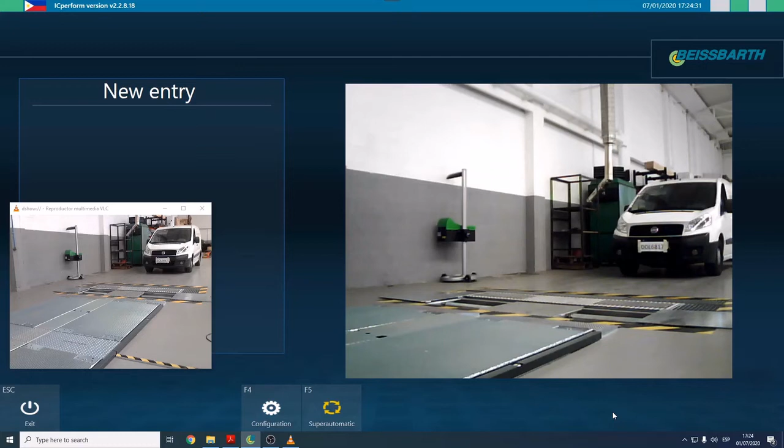Hello, my name is Albert, and we are at Kappa Test Facilities where a complete Beissbarth test lane is installed. Now we are going to show how the system works when the connection between IC Perform and the LTMS server is online and stable. First, it's important to know that the following three actions are performed automatically in background mode, and they are transparent to the user.

The first action IC Perform performs in background is requesting, in cyclic mode, the complete limit set for all possible vehicles to inspect. These limits are stored locally and are available from all the computers of the center. This allows the system to always be updated with the latest official limits. These actions are also very important for offline mode.

The second action is that IC Perform stores the users validated by the LTMS server in the test center's local database. These users are available for working offline for the next 7 days before expiration. This way, we can ensure that only valid users can operate the system offline in case of losing connection. The last action is that IC Perform cyclically checks for new vehicles registered by reading the RFID card, automatically creating the entry in the IC Perform system.

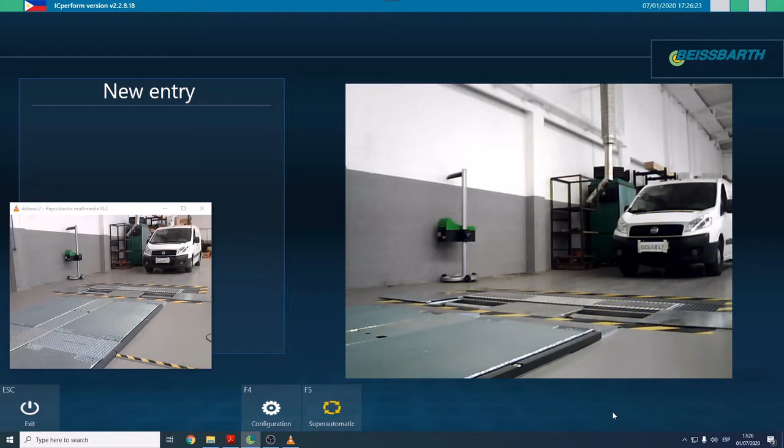Now we can proceed to show how a vehicle is fully tested in online mode. Once the vehicle arrives at the station, the first user, identified on the portable SBT 4000 device, reads the RFID card. If the vehicle does not have an RFID card, the user can request the vehicle data directly from the LTMS server using the license plate. Now we are going to show both options. The first one is the RFID card reading.

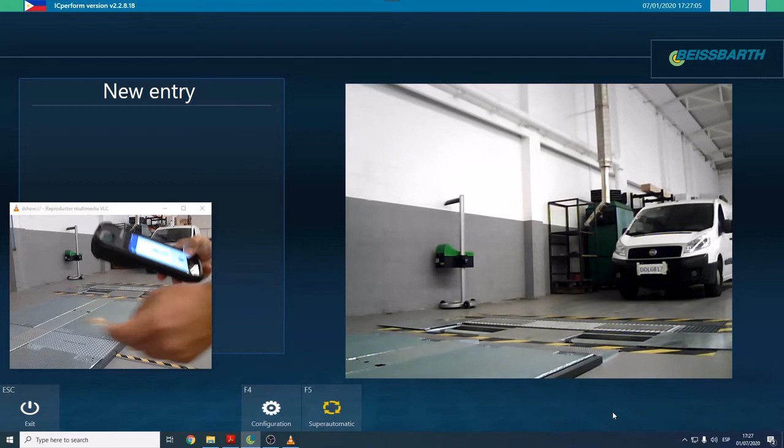So this is the device, and this is an original RFID card from the Philippines. By reading it, we can obtain all vehicle parameters.

Now the device will get the complete vehicle details from the LTMS server. IC Perform detects that the vehicle has been read and automatically creates the entry in the system. We can see it now under the 'new entry' label in the top left part of the screen. So now we have one vehicle registered in the system.

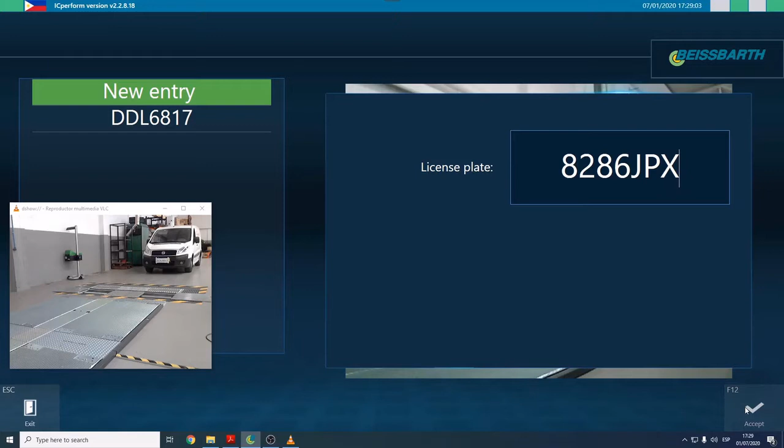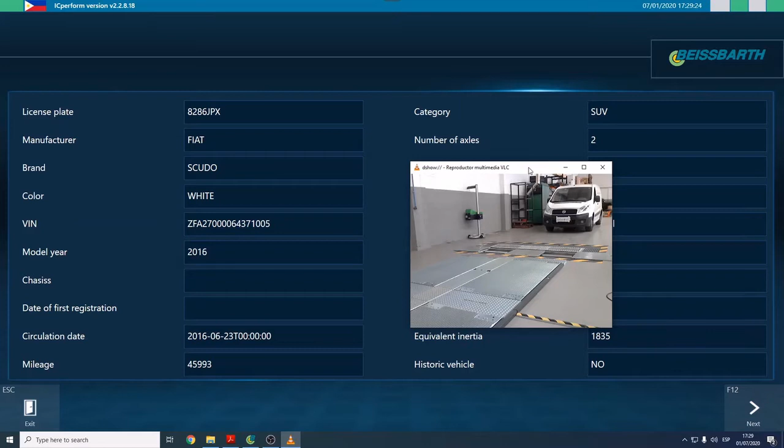This information is sent to the LTMS server, which gives us authorization to operate or continue operating. Now we type the license plate we want to add, and by clicking F12, the LTMS server responds with the complete vehicle details, coming directly from the database. Here the user can verify them and must confirm to register this vehicle into our system.

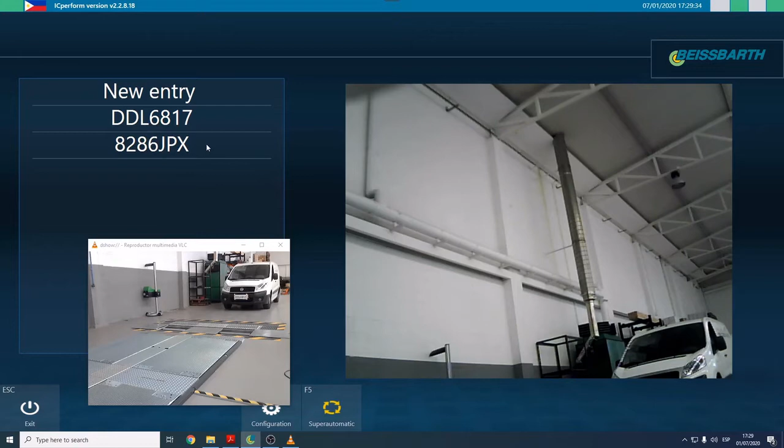So as we can see, we have both vehicles created here.

In this station, the first stage we are going to operate will test the side slip, suspension, and brakes, and also perform a visual inspection. To open the vehicle in the stage, it's necessary to identify the vehicle by detecting it using plate recognition. Now the vehicle will come to the stage. Once detected, we must identify ourselves again using the combination of username and fingerprint.

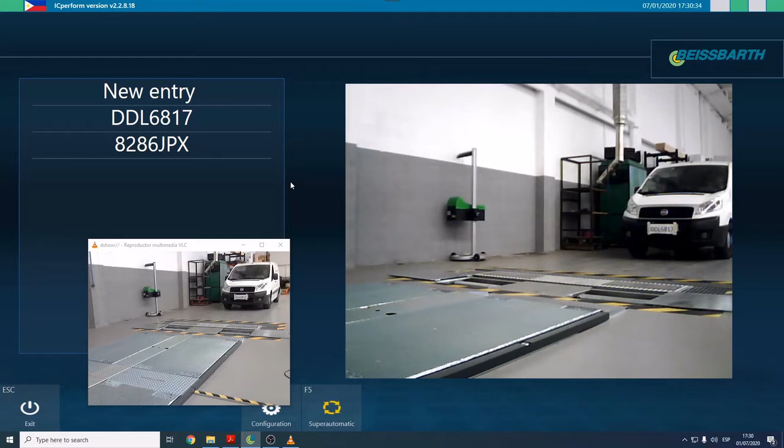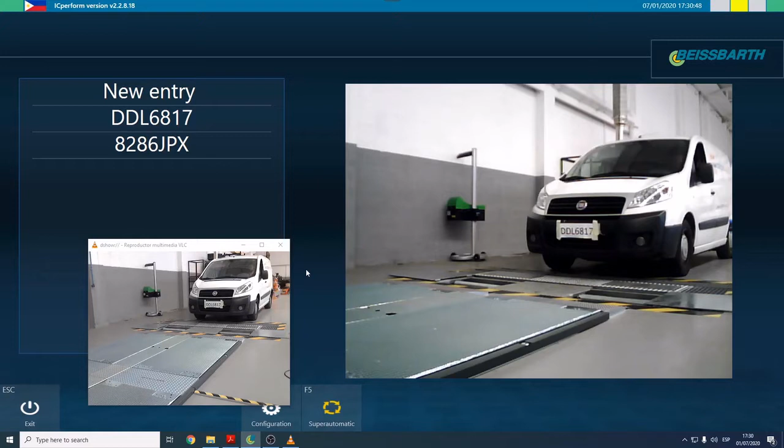So the vehicle is coming. Now, as we can see, this license plate is detected—it's the same as the vehicle's, meaning the vehicle is present, and we can identify ourselves. Again using the RFID card and the fingerprint reader, we get our biometrics, sending them to the LTMS system and receiving authorization to operate.

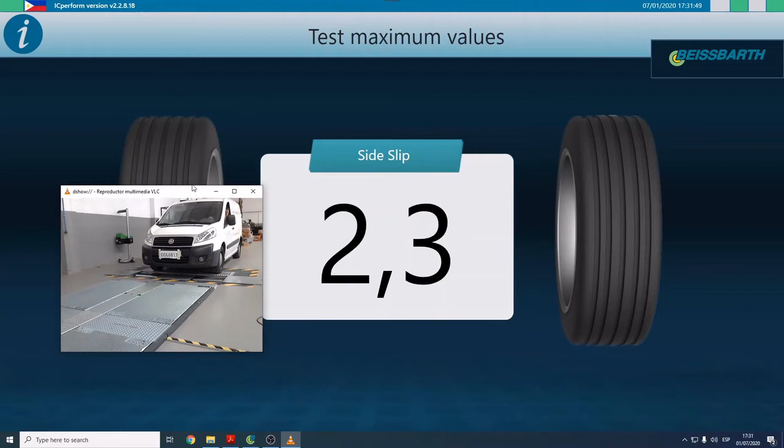Now we can start the test. First, we are going to test the side slip. Now the suspension test.

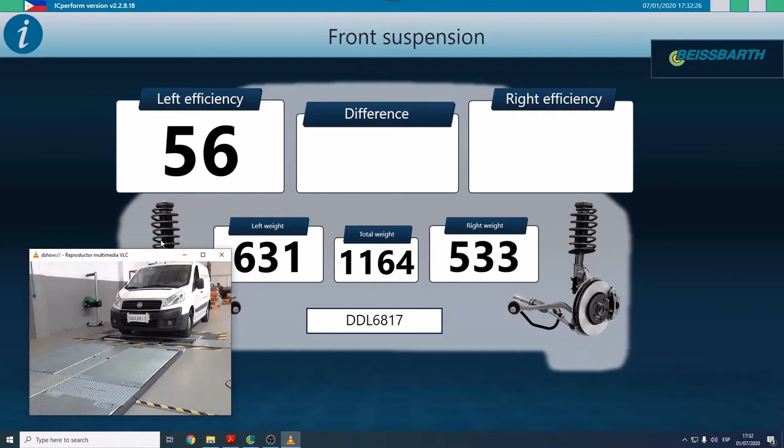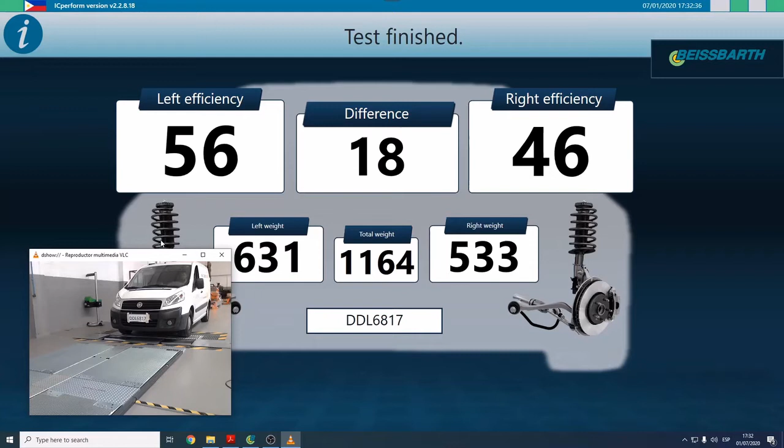As we can see, we are using a fake license plate because the RFID card we scanned identifies a vehicle located in the Philippines. To simulate how it will work, we created this fake license plate. Now the front axle suspension test is done. Now the vehicle is on the rollers, testing the front axle service brake.

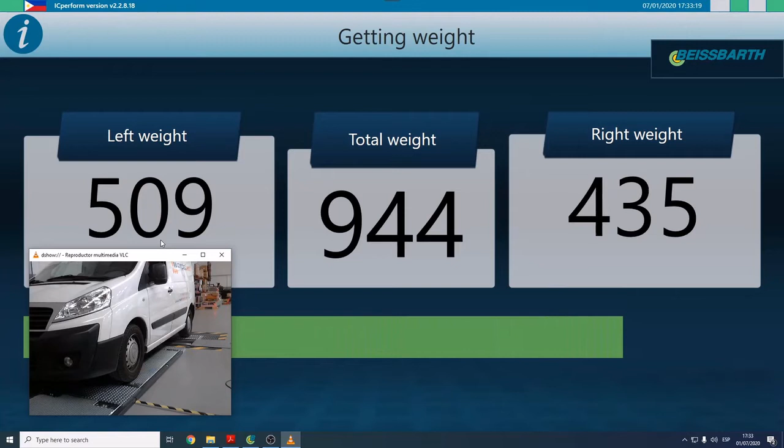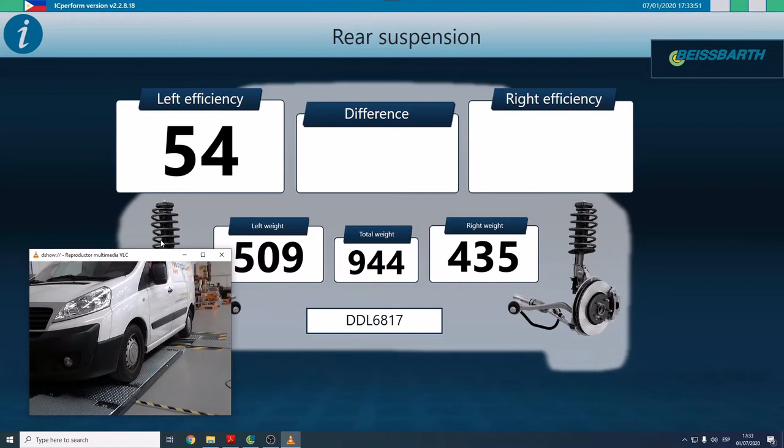Rear axle over the suspension plates. So the suspension test is finished.

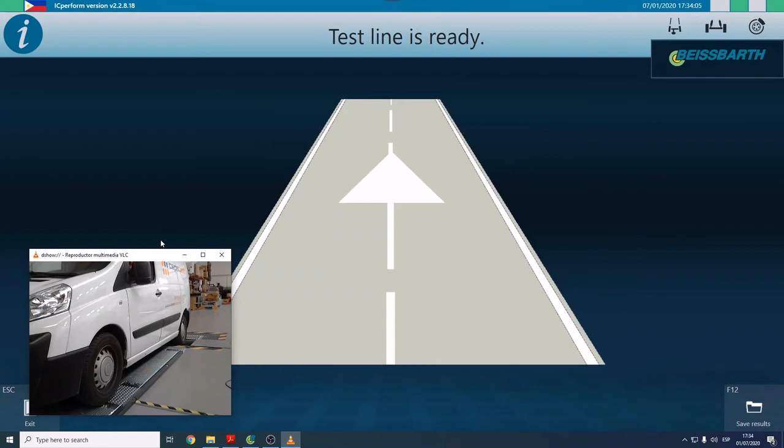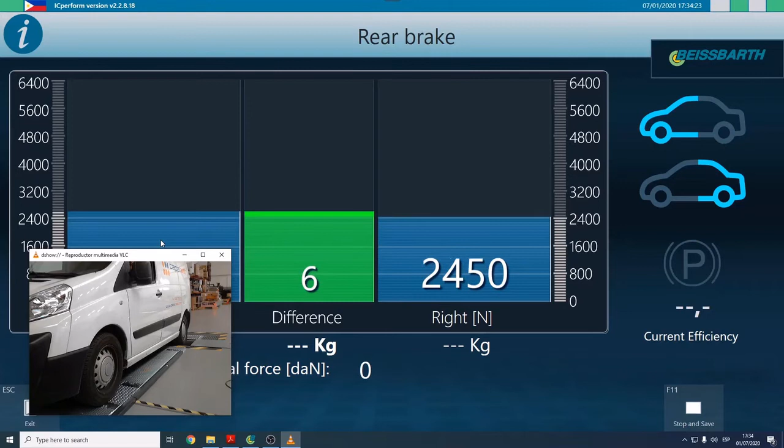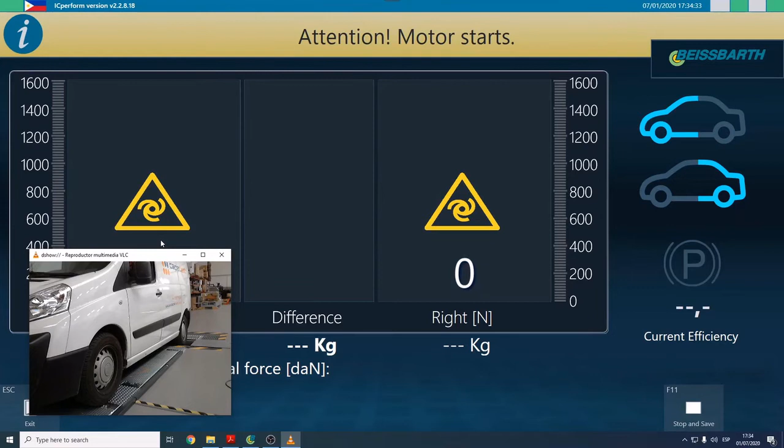Now we are going to test the rear and parking brakes. Now starting the parking brake. And now the test is finished—we can save the results.

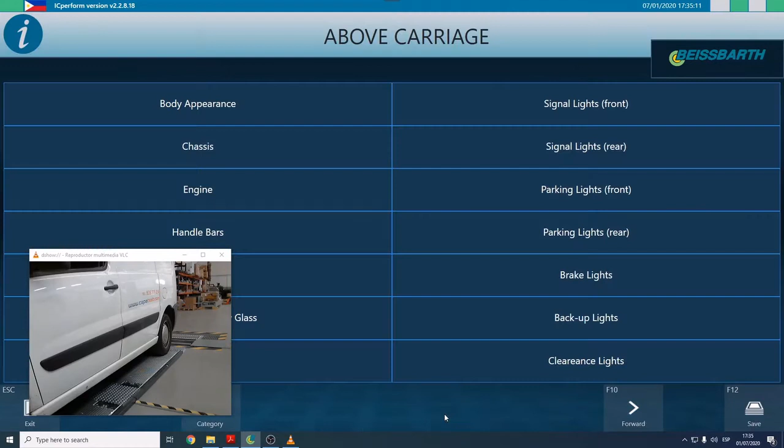Now we are going to perform the visual inspection. Here we can select between the categories: above carriage, under carriage, or others. To not take much time, we are not going to evaluate all the points—we are going to enter only some of them.

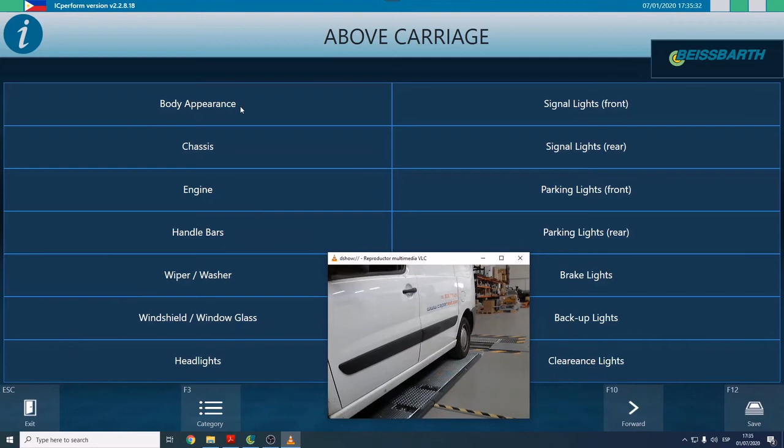For example, we can select between these three options. We can also select a different category. Once we finish, we can proceed to save the visual inspection.

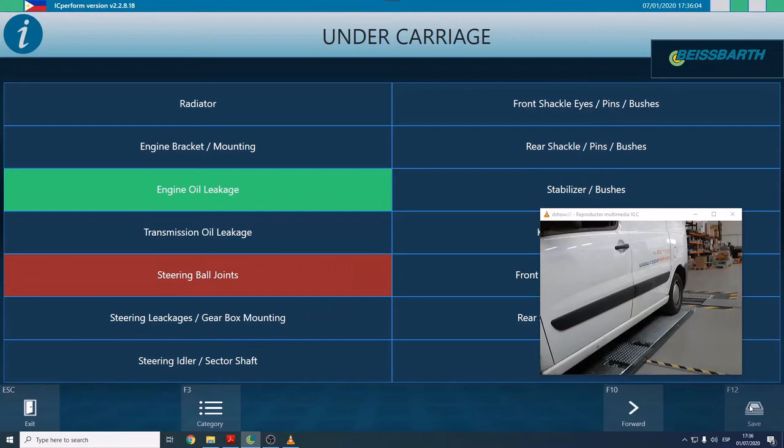Once the vehicle test is finished in this stage, the user can close it by pressing F11. Now the stage is closed and the results are sent to the LTMS server in order to have live data communication between the systems. Data is also stored in the local database. Now the vehicle can drive to the second stage.

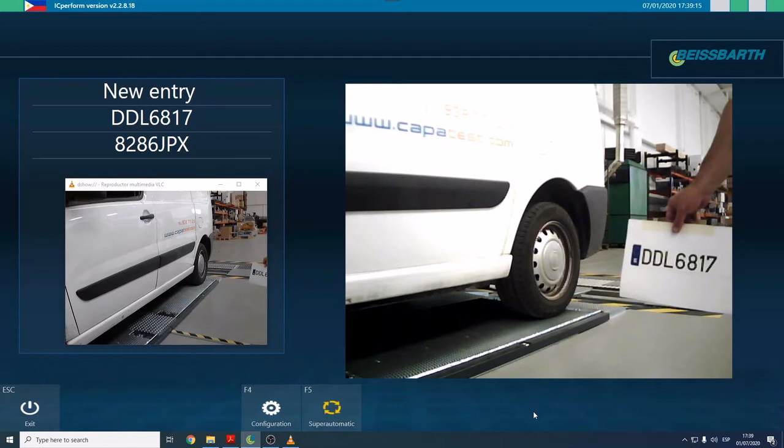In this second stage, we must do the same: first detect the vehicle using vehicle plate recognition. Now the vehicle is detected. Now with the F1 device containing the fingerprint, we get the credentials, and now we can start the next test: emissions.

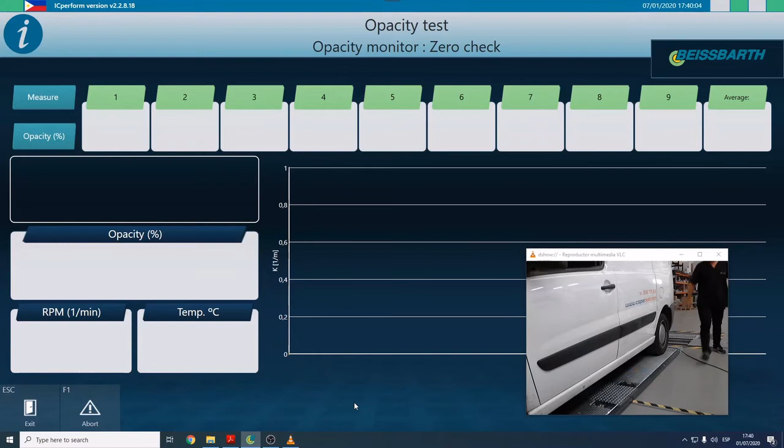Now we have values, the device is ready, and we can start.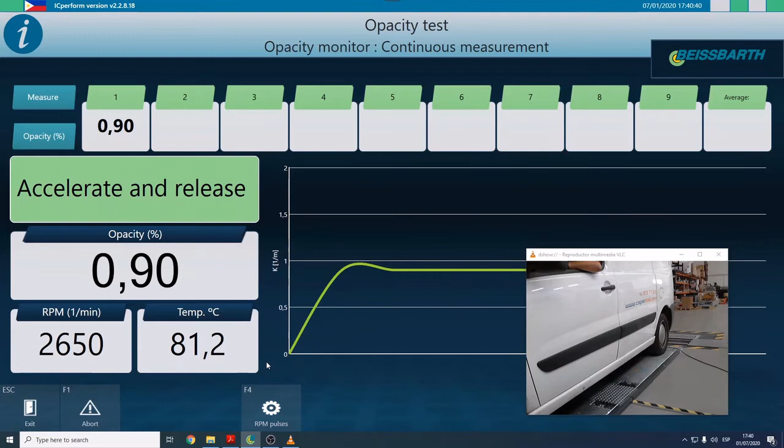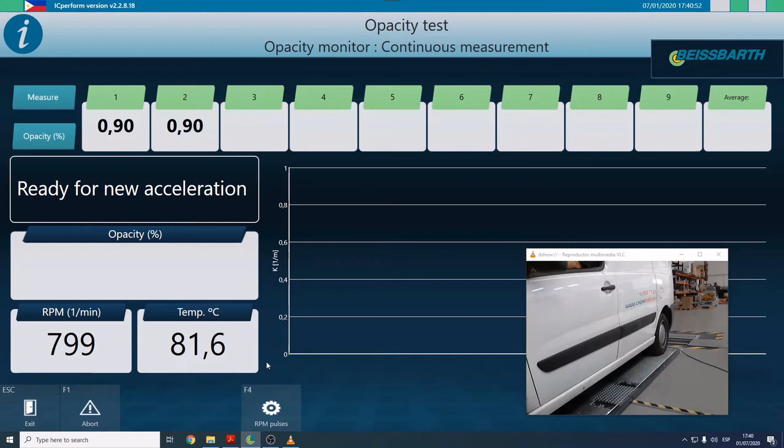Acceleration number 2. So we can see we have RPM, also oil temperature, and the opacity value.

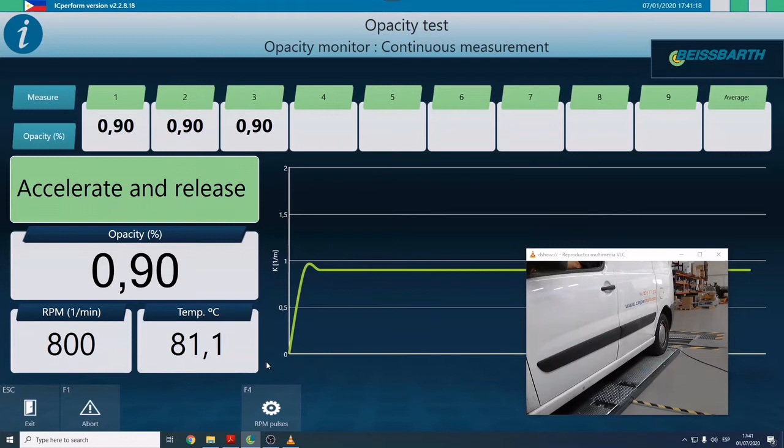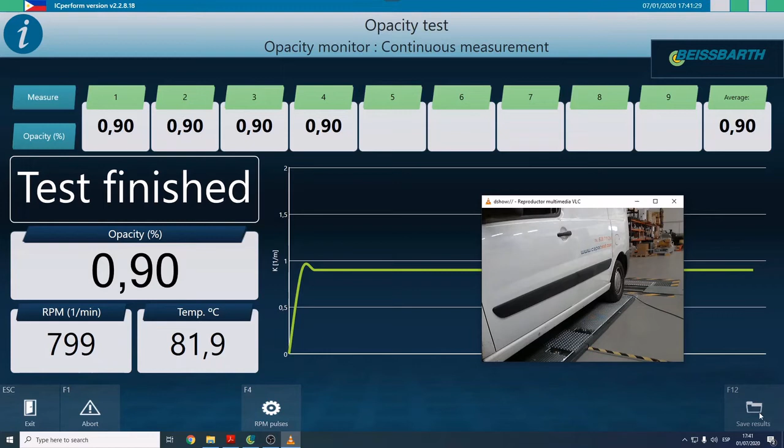And now the test is finished, so now we can remove the probe. And click F12 to save the results.

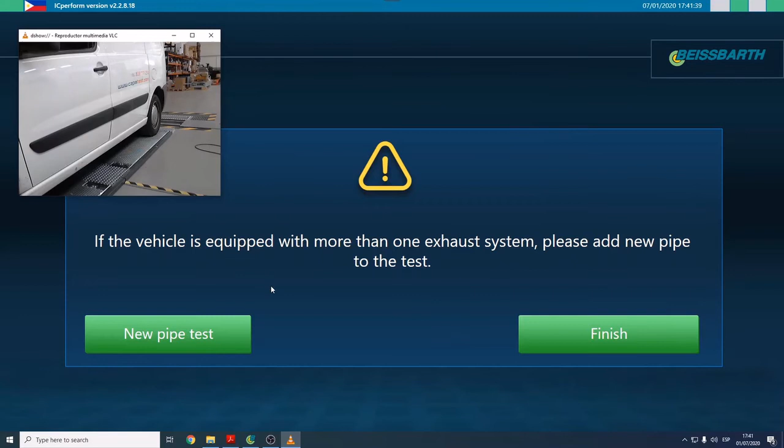Now the software is asking if the vehicle is equipped with more than one exhaust system, then we can perform a new pipe test. If not, like in this case, we will finish it because we have only one exhaust system.

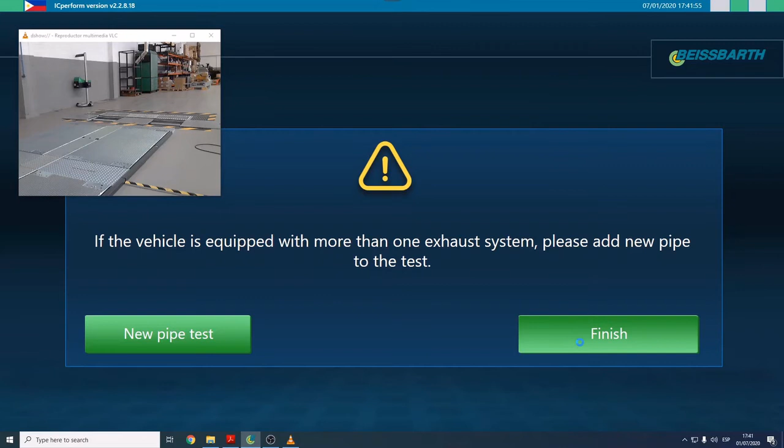Here we can see all the values are in the system, and by clicking F11 to close this stage, now the opacity values are sent to the LTMS server.

In this stage, we are going to test the lights system. We must do again the same. First, detect the vehicle using the vehicle plate recognition.

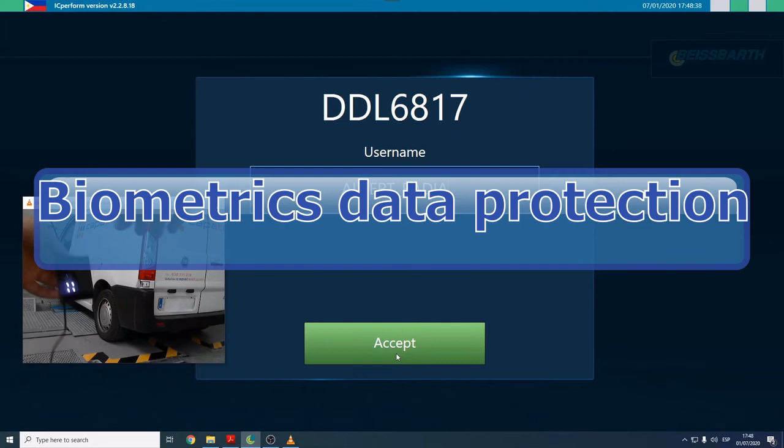Once it's detected, type the username and get the fingerprint biometrics. After getting the credentials from the LTMS server, we can start the light test.

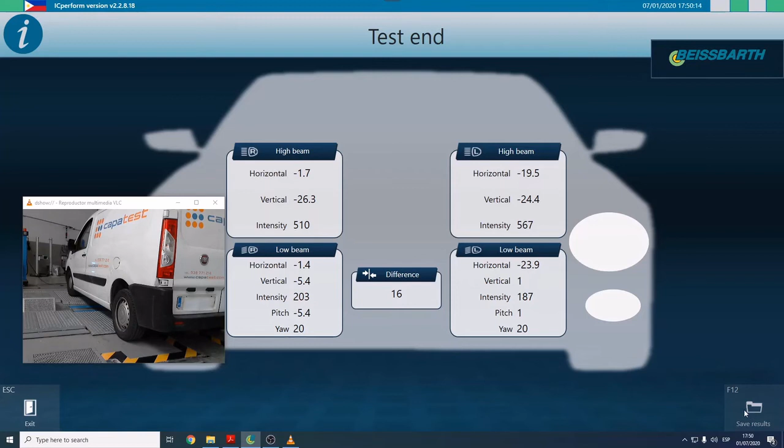Now the test is finished, we can proceed saving the results. Now the light test results are sent to the LTMS server.

And at this point, we have performed all the necessary tests for this vehicle. So now the next step is to finalize the vehicle.

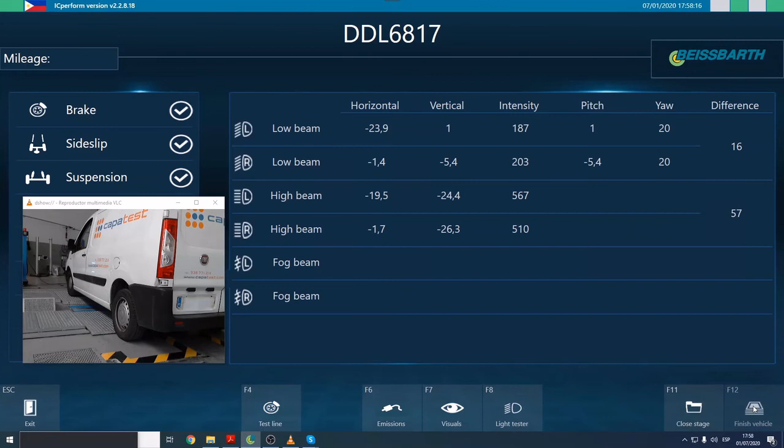To do it, we must click F12, confirm this interaction in order to be sure that we want to finish the vehicle.

And after confirming that the payment of the inspection taxes is done, the report is automatically generated and the final results are sent to the LTMS server.

So now the ICperform is collecting all data and sending everything to the LTMS system. We are displaying the final report.

So this report is displayed here in this top right side, the inspection reference number, that is unique for this inspection, and this number gives us the possibility to have some kind of traceability between the document and the results that are in the database.

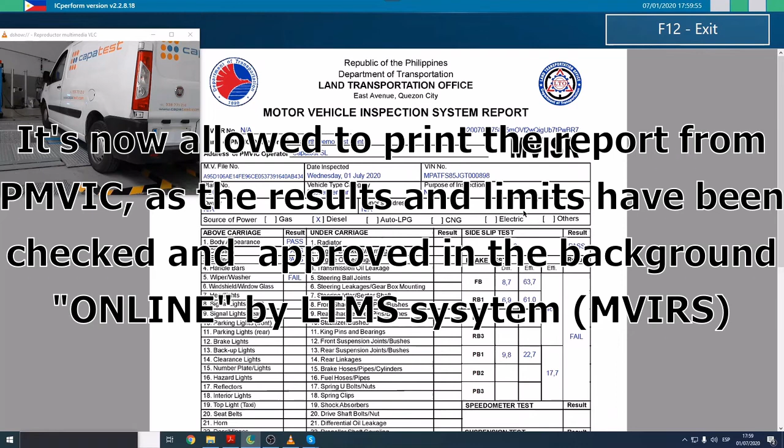We have also the test results and the evaluation of these results. This evaluation is done in the LTMS site. So we are displaying the results here.

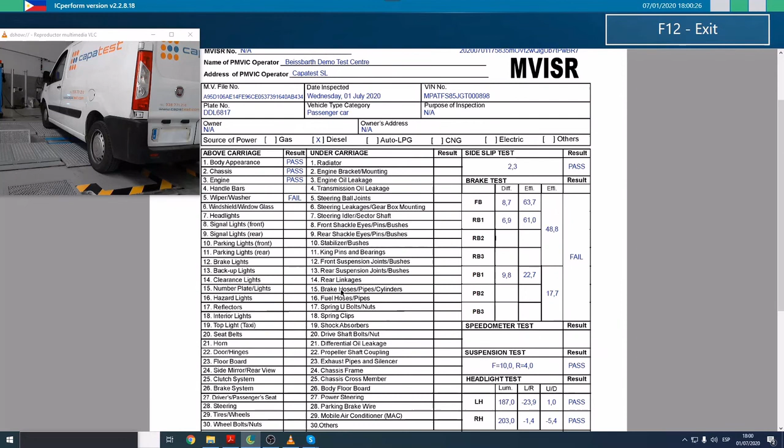And we have also in the left part the visual inspection results. We can see here the visual points that we entered randomly. And this report can be printed or saved in PDF.

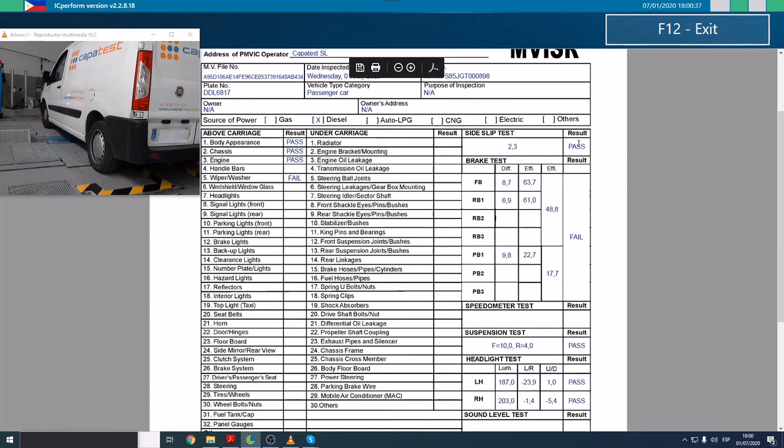So now we can close the report, or let me first show you the last part. Last part has the overall evaluation for sure, and also this part that gives some more information to the traceability.

In each stage, it's displayed the user that performed the test. So with this document, we can know which vehicle it is and who did the test in each computer.

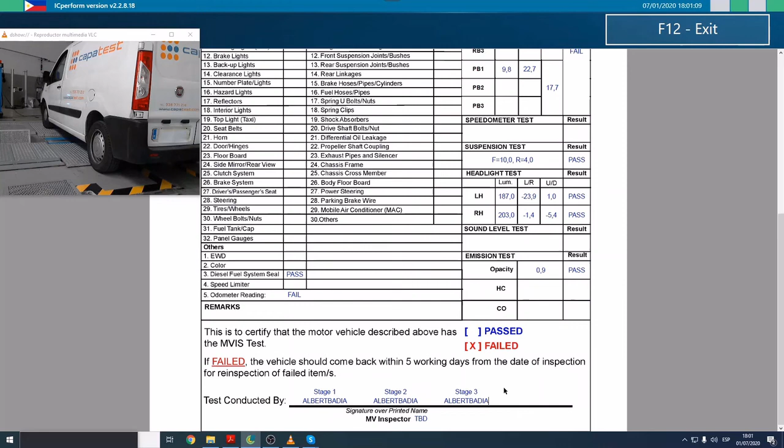So now we can close the report. And if we check the vehicle list that we have here, we can see that the vehicle isn't available in the system anymore. This means that the information is correctly sent to the LTMS server, and now the vehicle can go out and leave the test center.

So to validate that the information is in the LTMS server side and it is correctly transferred, Bren, who is managing the server side, is going to explain it. So Bren, please. Thank you, Albert.

So I'm going to show my screen now. So this is the PMVIC inspection homepage. Upon clicking this icon or the button, it will be redirected to the search page of the PMVIC inspection results page.

So as you can see, there are so many records. All these records are from Beissbarth. So I'm here to show you that the two systems, Beissbarth and LTMS, are fully connected and functional.

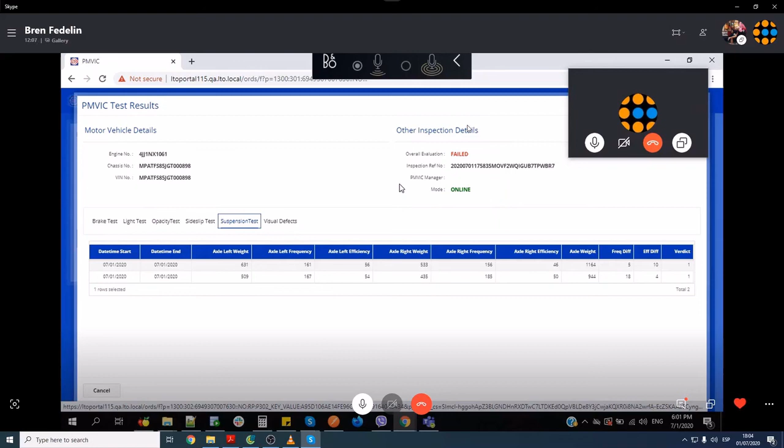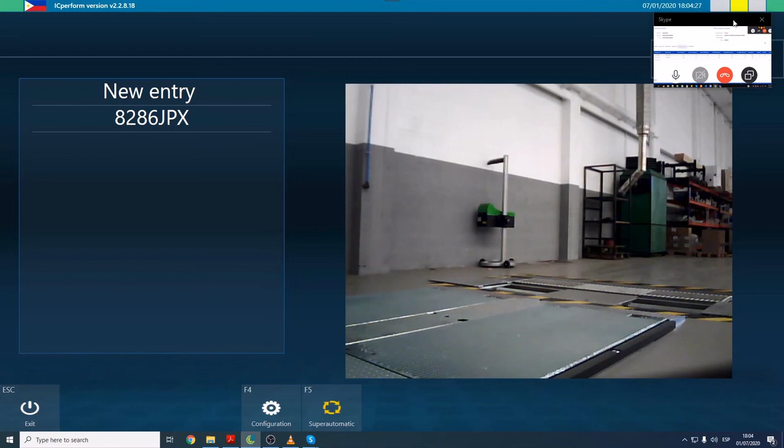Okay, thank you, Bren. So to summarize, we know that the ICperform is updating the critical information, users and limits when the system is online. We saw all the steps to follow to perform the test in online mode. And we saw also that the data is correctly transferred to the LTMS server each time that a test is ended and when the inspection is finished. So thanks for your attention.